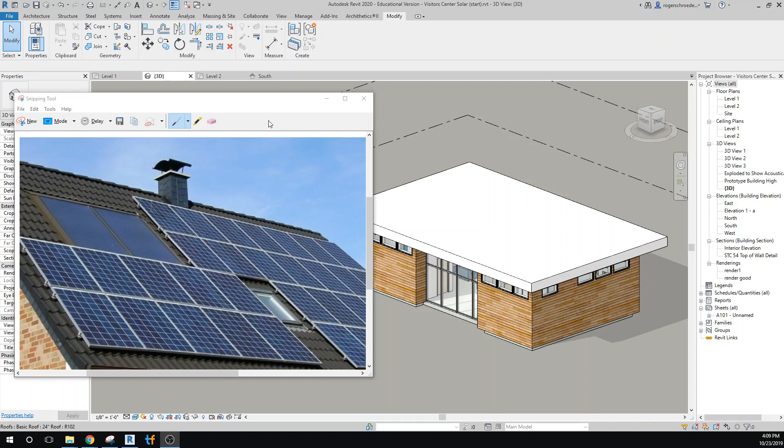So let's start by figuring out what kind of panel we might want to use. So I've gone ahead and found a distributor just through the internet. You're welcome to look for other sources, but this company makes all kinds of solar panels or distributes them, and they're a wholesaler. We couldn't buy them, but an installer could. And we're just going to use this as a reference just to help us do layout.

And I'm a cheapskate. I'm going to pick the one that has the most amount of power for the least amount of dollars. And I'll click on it so we can look at the specs of it. It gives us the dimensions, the weight, really everything we need here. But they also have a spec sheet that we could download and take a look at. And you can see key features.

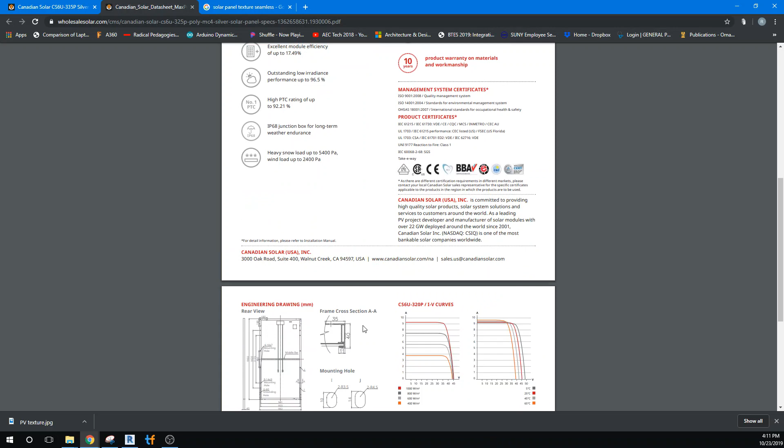It's almost 17.5% efficient, which means that of the 100% daylight that hits it, 17.5% can be converted to electrical energy. It has a guarantee of power output for 25 years and a warranty of 10 years, so it'll be hopefully around for a while. So we have our dimensions in that.

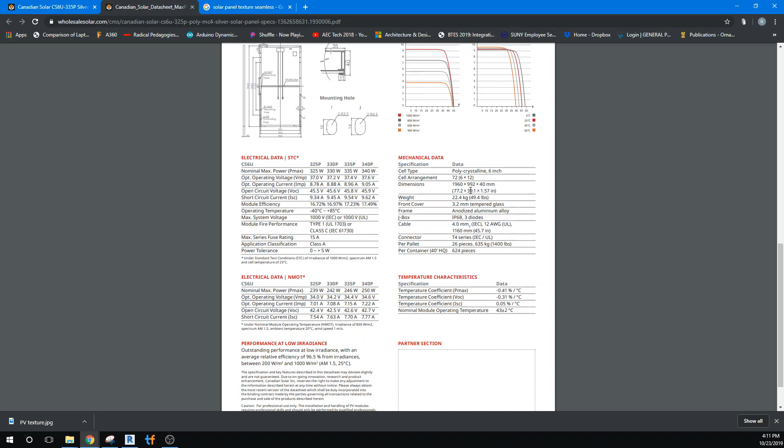So let's go ahead now and make up a mock-up that we can use on our project. And in this case, this panel is 77.2 inches, so I'll use 78 by 40 by 1.6 inches. So I'm going to go out to Revit, and I'll close a couple of these windows off here so I don't get too busy with it.

And our roof that we made is, I'm going to go back to edit the type, but I believe it is 24 inches thick. So we've got to accommodate for that when we look at creating a roof-mounted panel for this roof assembly. So I'll just cancel out of that. And first thing we'll do then is make a generic component that we'll rename a panel.

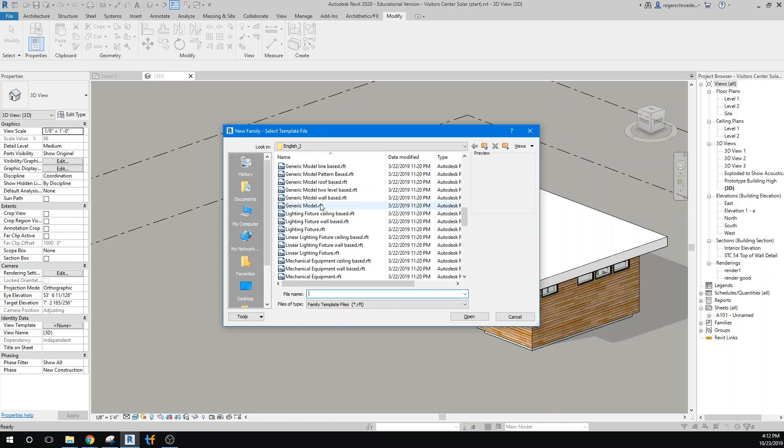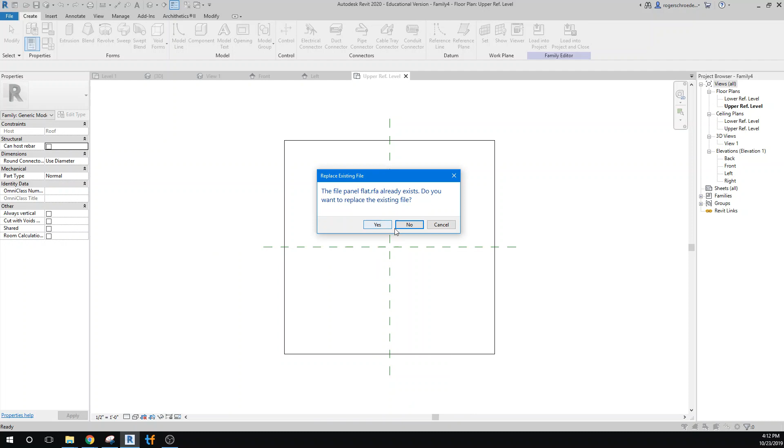So I'm going to open up a new family. And instead of a generic model that is just with nothing, no references, we're going to use the one that's roof-based. And I'll go ahead and open that. First thing I'll do is I'll save it so we have some idea what its name will be when we place it in. I've already started one, so I'm just going to click and rename over that one. It's called Panel Flat, and yes, I'll write over the existing file.

And we'll go ahead and we'll make an extrusion. We're in the reference level of the top of the panel, so we'll make the overall shape of the panel. I'll just go in and edit these. So we wanted this to be 78 inches by 40 inches. Oops, and I always do that. 40 inches. And let's just center it on the grid, on the reference plane.

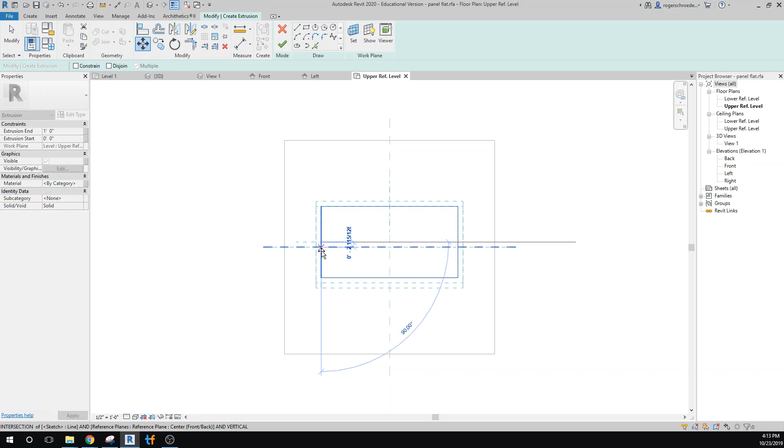So I'll just grab it and move it over. And I don't know why I'm not getting the other reference. Let's try that again. There it is. Okay, so if we click off of this, we'll extrude it a foot thick, but we don't really want it to be that thick. We want it to be 1.6 inches thick. And I've got too many inch markers here.

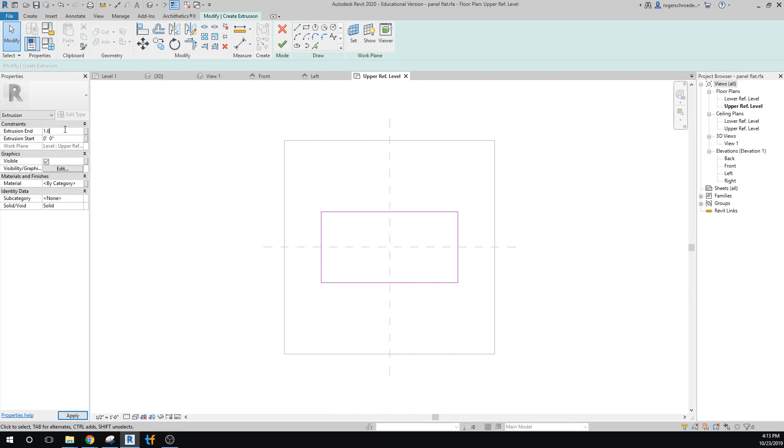And we'll apply that. We'll click out of that. And we'll go to the front elevation just to see where it's at. And I'll zoom extent, ZE. And the panel is based at the bottom of the roof. But let's go ahead and fix this roof right away.

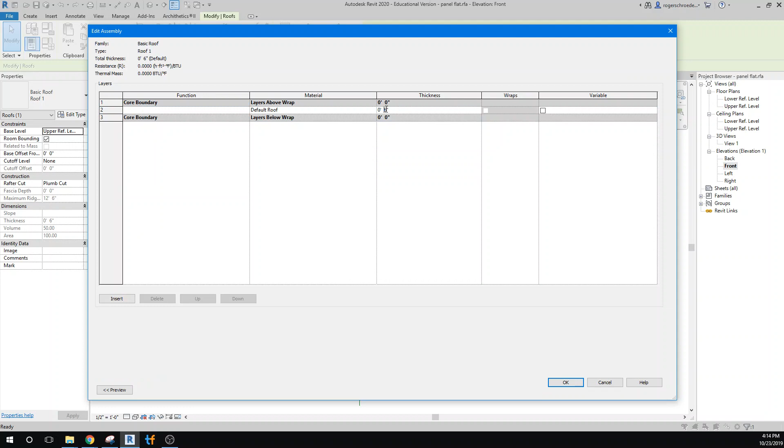I'm going to edit its type so that it's 2 feet thick. So I'm going to change this to 24 inches, so it's a better representation of the roof that we're using. And I'll go in now and grab our panel, and I'll copy it up. Probably have to take the constraint off of this. And I'll move that up so it's sitting right at the surface.

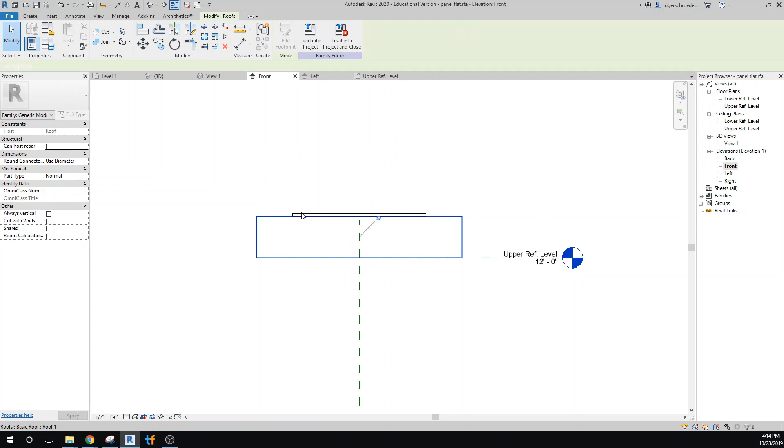Actually, what I'll probably do is, let's do that right away. We can't actually put that on the surface because there's got to be mounting clips and there's too much going on there. So let's just move this up, let's say 2 inches above the roof surface. And then I'll get in here and delete this other one that I've created.

Okay, so now let's give it a texture so that it reads right in a graphic or a visualization of it. And what I've done is I went out to our site again and I grabbed a texture. I did a search of solar panels, texture seamless, and I grabbed one that had no external tabs on it like this, but it's got a watermark, but that's fine.

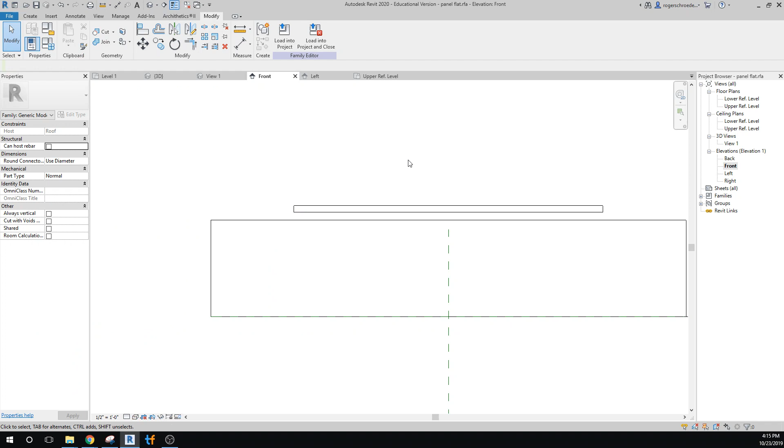And I save that, and we'll go back to Revit now, and I'm just going to put a surface texture on that, but I want the sides to still be white. I don't want to map it all around it. So one of the things I could do just as a quick hack is I'll just copy this one up, and then I'll come in here and I'll pull this original panel down away from that just a little bit, or as little as it'll let me.

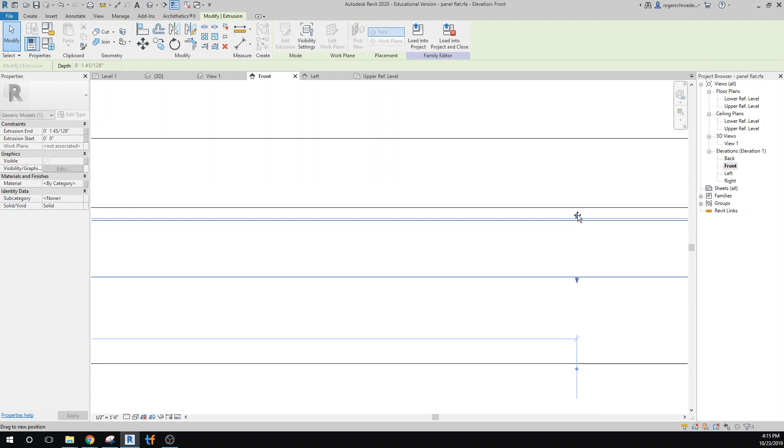And then I'll grab the top one and pull it down until it touches that surface. Now I have a surface that I can apply a texture to. And we can look at this in a 3D view. So that's the reference roof that we're going to use. And I'll grab that panel and we'll build a texture for it. So I'll go to our textures and create a new material.

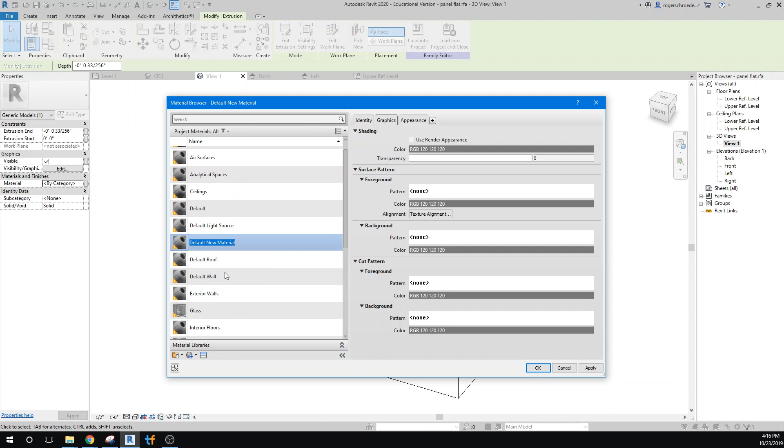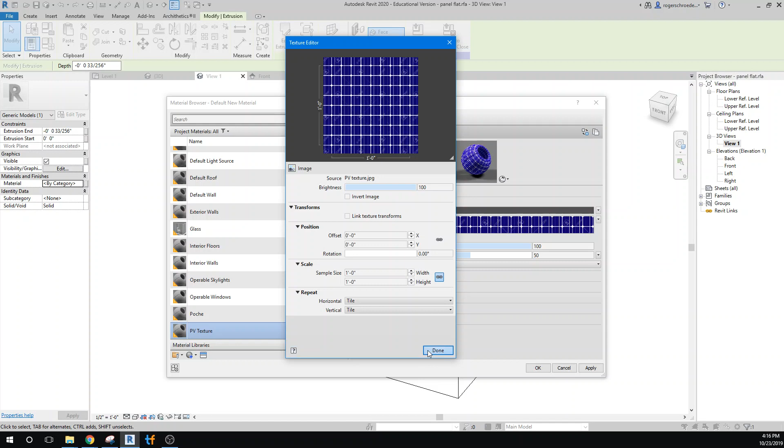And rename that material PV texture, and we'll grab the appearance palette and we'll go out and search for that texture that I downloaded, and let's just check its size. It's 1 foot by 1 foot for that amount. That's probably fine. So we'll just go ahead and apply that.

Click OK. Let's see if that'll render inside of the, yeah, that looks a little bit tiny. It's not going to read very nicely. So I'm going to make an adjustment to that texture. So I'm going to go to Manage, Materials, and grab that appearance again. And we want to make that bigger. So instead of that being 1 foot, let's say something like 2 inches.

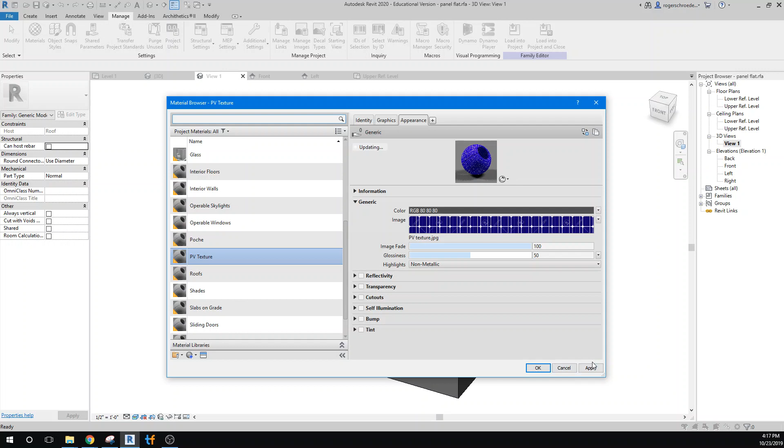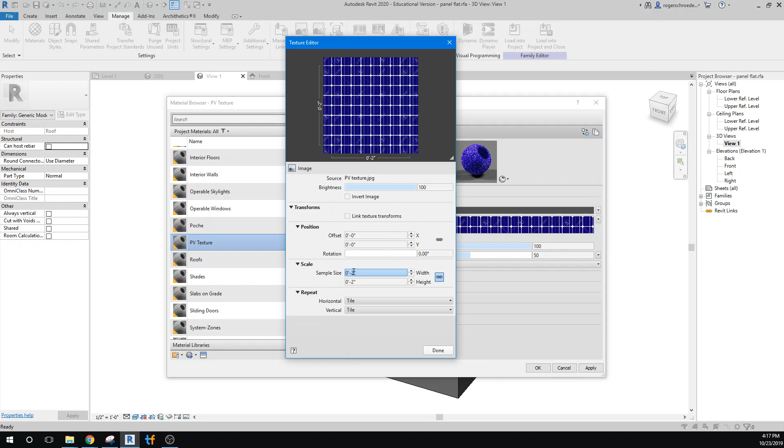I went in the wrong direction. I wanted it to be bigger. Sorry. Let's try 24 inches. Oops, that was fine. Okay, that seems to read pretty well.

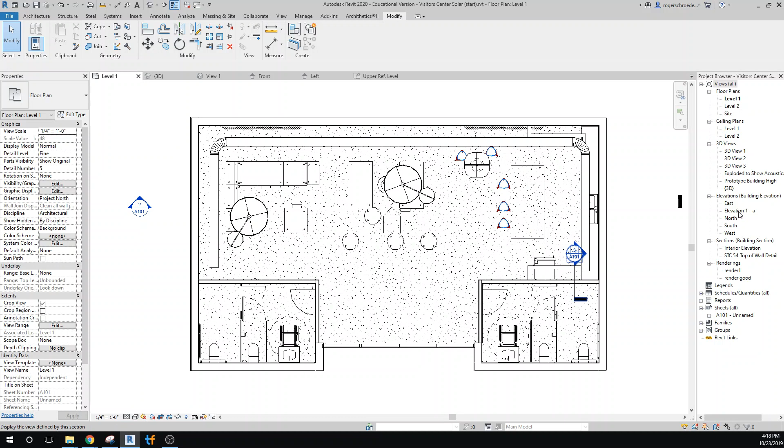And let's go ahead now and see if we can place that on our roof of our project. So we'll go to Load into Project. And I've already placed this one in before, so I'm overwriting an existing, but this would be a first time for you. And we can actually work on this in the 3D view. And I'll go ahead and place a component just to get an idea.

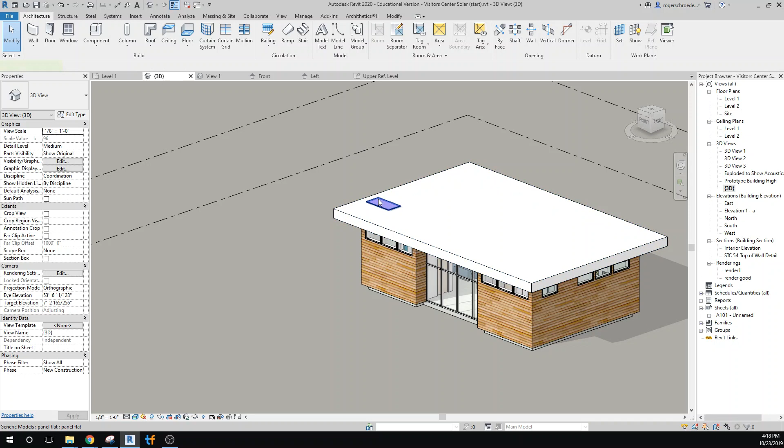And it should reference right to the top of the roof. And now in the next clip we'll work at starting to lay these out, and we'll look a little bit at how we're going to do some calculations with this.